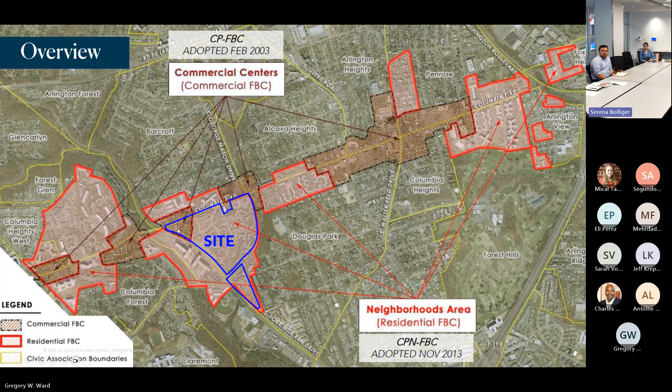Here's what the regulating plan of the neighborhood form-based code map looks like. Again, that top left corner - I should also say the orientation has changed now, so north is up and south is down. So that corner there on the west is in the commercial code. Everything else is in the neighborhood's form-based code.

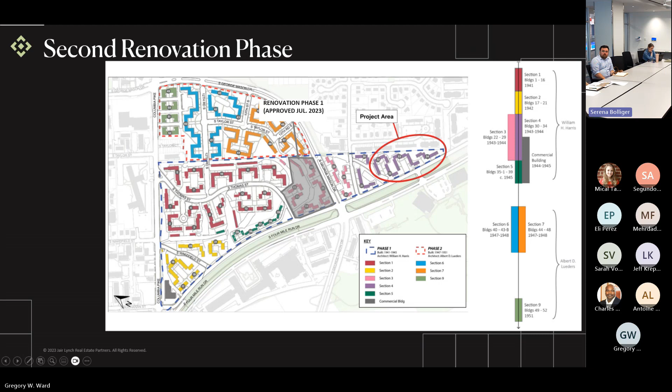Here's the aerial image of where this renovation phase is within the whole project. It's that tail end of the form-based code where no redevelopment's anticipated, so this was a great opportunity to go ahead and get started on renovating these units for existing residents - buildings 32, 33, and 34.

Now into the photos. These are some photos of building 32, the one farther north facing the parking lot on South 4 Mile Run Drive.

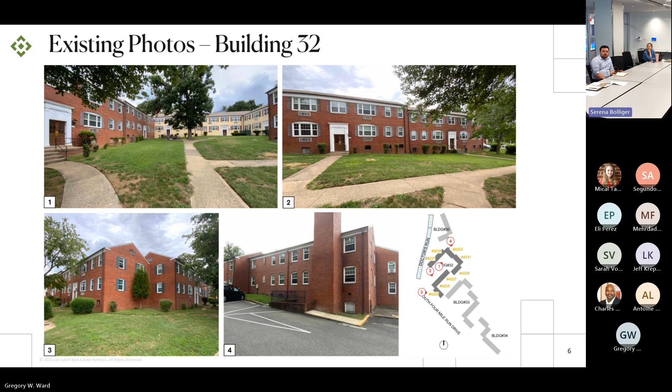This is building 33 facing South 4 Mile Run Drive in the middle there. And this is building 34, right at the tail end, facing South 4 Mile Run.

Now into the renovation scope of this project, which is very similar to the project we just went through. I'll note there are no rear additions because of where this is located in a resource protection area floodplain, so no opportunity to add additions to the backs of the buildings to make units bigger. But there was an opportunity to add accessibility because of the way the grade is across building 33. The key differences between phase 1 and phase 2 are no rear additions and adding some accessible entries.

In terms of building renovation, the exterior work is very similar: cleaning up the brick, and we'll be infilling some of those older PTAC heating and air vent systems on the front and filling them with new brick. Some of these buildings already have painted brick, so where we're infilling brick, we will paint it to match the existing painted brick so it blends in.

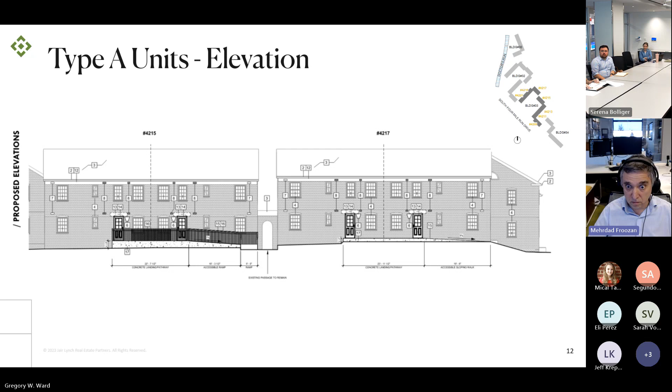We are also creating 4 new openings to get inside the units, with 4 new doors that, in a few minutes, we can explain. We can show in the next slides.

This is a perspective of the same elevation shown in 3D. On the left side, again, you can see the ramp that is like an L-shaped ramp, and then it has a common landing for the two entries to Unit 1 and Unit 2 on the left side. We're building the address 4215.

On the right side, as you see, it's just a sloped walkway that creates the access to those two units on the right side. We have building 33, address 4217. Next slide.

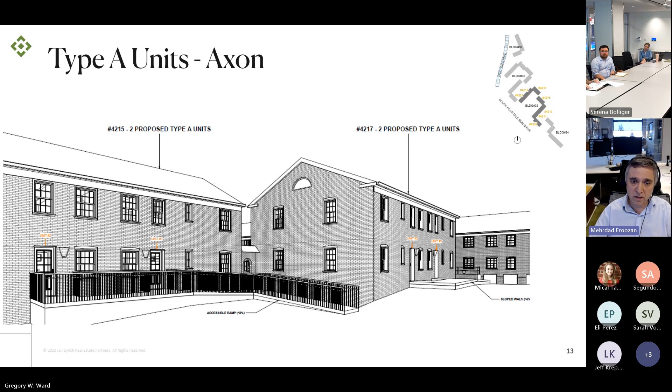What we can say on this slide — well, we're showing the new light fixtures, very similar to the existing for all three buildings in the scope. Building 32 has 14 of these lights, building 33 has 9, and building 34 has 5 of these lights — the same type of exterior lighting.

And then also we have the cladding on the left side. We are showing the cladding on the existing trims around the door and elsewhere. Next slide.

Same as phase 1, the 5 buildings 22 to 26 — we are replacing the windows with vinyl windows. These are like simulated divided lights, 6/6, and we are also changing the basement windows as they are, in kind. So the vinyl windows match the existing style and color, but they are much more performant in terms of U-value and SHGC.

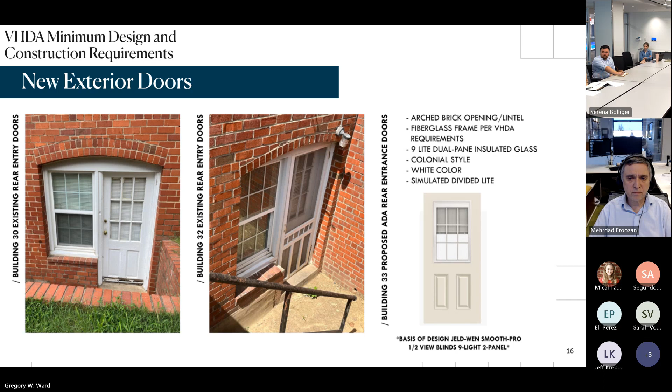I think this is the last slide, if I'm not mistaken. We still have something similar to last time. As I explained, for the exterior trims and fascia, we're going to use vinyl cladding, vinyl coated aluminum, or similar materials for the trim and fascia.

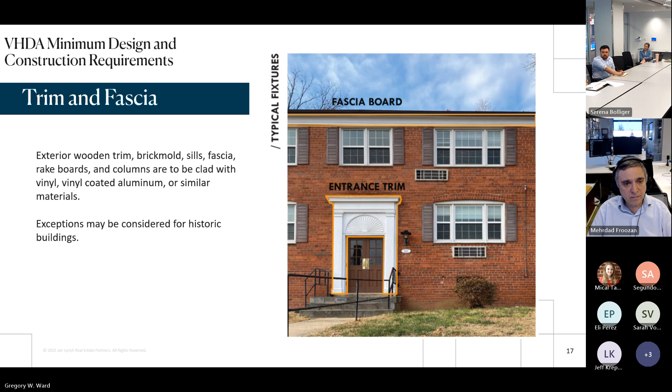It provides a minimum of 30 inches of overhang, and on each side of the door it goes 12 inches. So that's the dimension of the canopy.

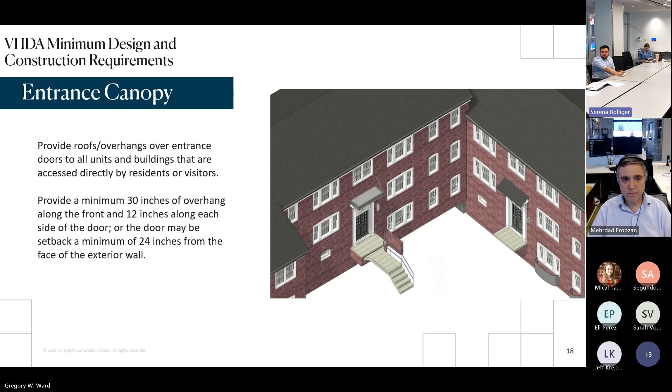The number of canopies is indicated on the left side at the bottom of the page. Building 32 will get 8 canopies, building 33 will get 7 canopies, and building 34 will have 4 canopies, all of this option 2 canopy style.

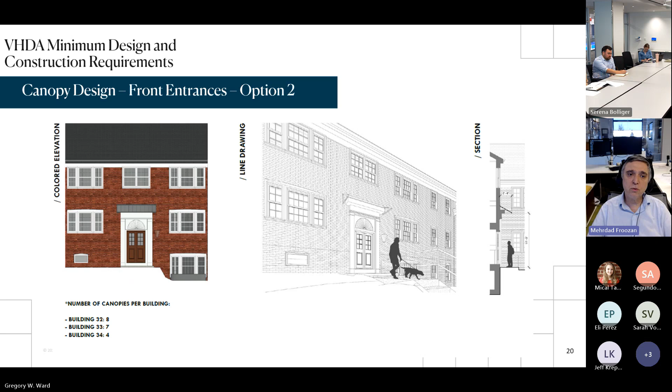For the back side, we also have back entrances that will get canopies. Building 32 gets 6 canopies. Again, the number of canopies is marked here, with the same style of option 2.

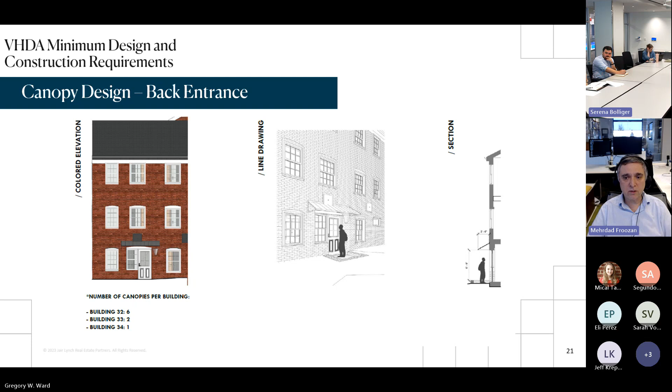Thanks for that. To summarize our application materials, we submitted the form-based code use permit last week, and that's now being routed to staff for review.

We've got that use permit for our building renovations and site improvements with modifications, similar to last time, requesting a modification for the parking to permit the existing ratio to remain, minus those three spaces that were needed to be removed to create the ADA accessible spaces.

And then we've got two tiers of conservation area standard modifications. The first is for window replacements to be vinyl material, for new rear penetrations for ventilation, heating and air systems, and for new rear penetrations for the accessible unit entrances and that fiberglass door material. The second set are ones we'll be requesting waivers from Virginia Housing for, which is the vinyl aluminum cladding of the wood trim, and the canopies.

In terms of timing, this is our first meeting with you all here. We're anticipating going to the HALRB at the next meeting this month on the 20th, and then again at least going to the HALRB at the October meeting. We're anticipating going to Planning Commission and County Board on this use permit later this year in December. So that concludes our presentation. We're happy to get into discussion and answer some questions.

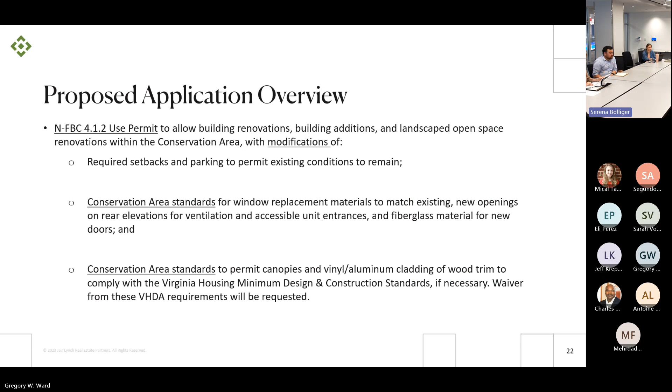Could we go back to the slide with the accessible entrances at the rear? The elevation? Yes. There you go. There you go.

The problem I see is this seems to be grossly overkill in terms of the handrail. You don't have that much of a grade or drop, and I don't think you need a series of vertical pieces there. You could solve that with a couple of light horizontal or near-horizontal pieces and have a handrail that doesn't present such a strong presence. That handrail could be handled a lot better, I think.

Well, my answer is that at this time we really didn't design the railings, so definitely you're right, we can make this much lighter and better for this purpose. Mehrdad and Jeff, are there any building code or accessible regulations that require a railing every certain distance, or how much room do you have to work around?

Well, normally a sphere of 4 inches should not pass through the pickets. I should say that we still don't have a very precise survey here, and probably the difference of elevation is so small that probably we don't need this much pickets and railings. But Jeff, I think you can better speak about this.

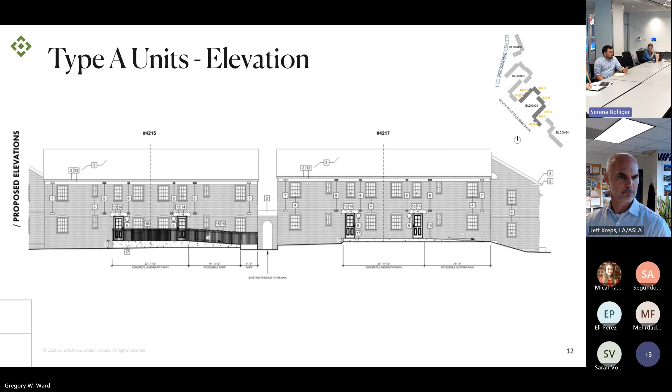Will light fixtures be the same on the front as on the back as well? Will it be different, I guess, from back to front? Are the light fixtures on the back next to the new entrances, are those new? And then will they match the front? I assume they will. No, this is just graphically, it's symbolic. It's not exactly what the light fixtures that we showed in the picture will be the ones we are going to install. Yeah, this is basically coming from the software.

One other question, you did say that the unfortunate air conditioner HVAC units are going to be removed from the front and they will be on the back. All of them? On all rear elevations, we're going to have some new penetrations for the upgraded heating and air systems, the brick vents like last time through the rear. So yeah, those PTAC units on the front will be removed and we're infilling all that with brick, just like we did with the first phase.

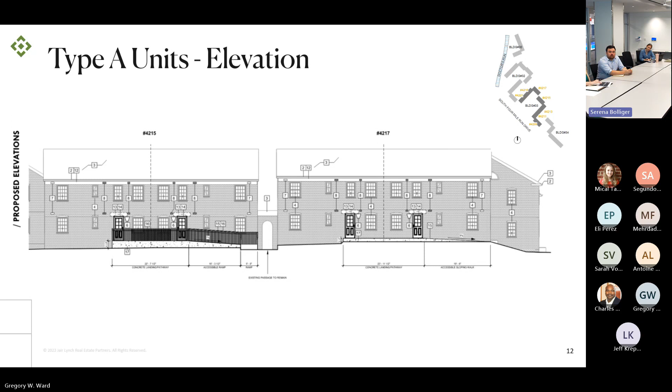And then, like I mentioned, Greg, if you go back to some of the existing photos, some of these buildings have already been painted that kind of blonde color. So where we have, we'll be removing those vents next to where the numbers 3 and 4 are, and when we infill that with brick, we'll match that brick to the paint on the outside so that it'll fit in seamlessly.

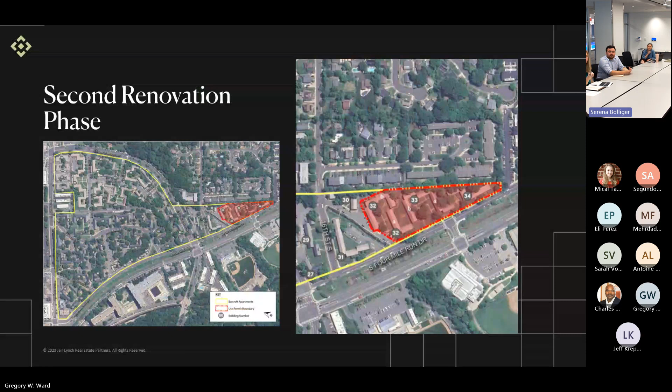I had a question about the passageways. Is there only one of those, or are those like at every building? There's only one in this section. Although I can't say, Sarah, you might know more about whether or not that kind of archway at building 33, the right there, are there other ones across Barcroft site that are like that?

I think so, but let me follow up with you. There's a similar one on building 32 that you can kind of perceive on that key plan where you have that split between the bottom leg and the top leg. Yeah, there are two altogether, just on this section.

We can follow up on other sections too, if that appears elsewhere on the site.

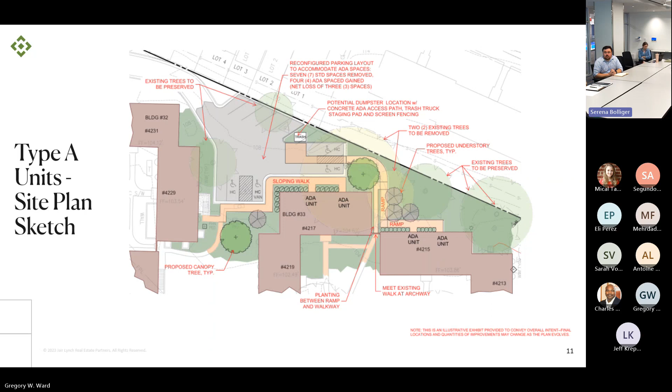Jeff, don't we have some small units going outside the building? There are a few, yes, and they've been preliminarily located on the backside so you don't see them from the street, like those little condenser units. Yes, and I think we're showing that in our more detailed use permit plans.

Anything else? I guess the condition at the ADA units now, is it a stair down or stair up situation? It's just a curiosity, there's nothing specific.

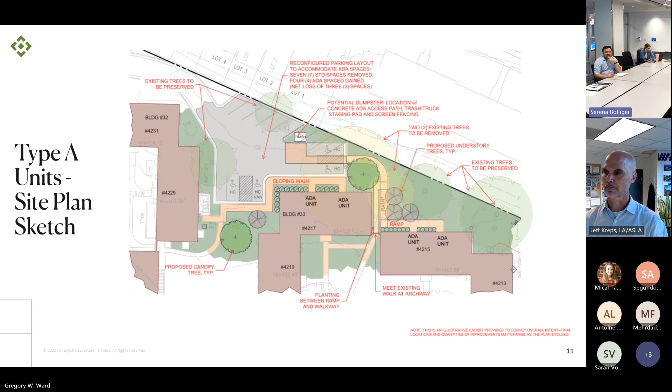Greg, do we have photos of the back of building 33 up there? No, I think it's just the front. There's no door there right now. Because if you remember, these buildings split when you enter, so you can't get accessibility through the main entrance, you have to punch through the back.

You'd park there, walk back, and then get on a pathway to get up at that level. This is a unique part of the site where the grade actually goes up with us, so we can punch in without doing a huge ramp, which is pretty rare.

Lauren, to follow up on your question, I think this type of passageway is unique to this section, section 4, but there are other passageways a little different in the second phase. The second phase has these big paths, since the buildings are so long there, they just kind of cut through. They're not ornate, they just cut through the building, but definitely different than this.